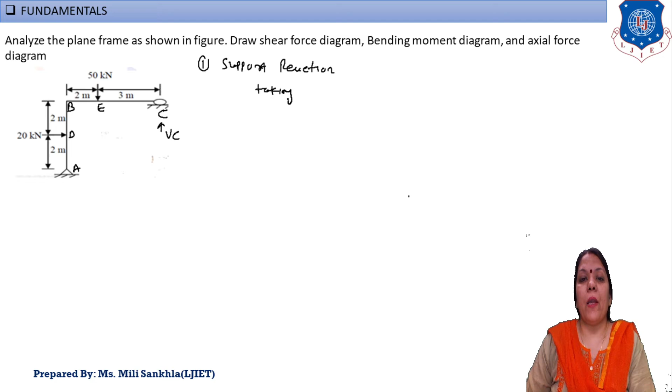Now the first step of this frame is to find out the support reaction. Okay, write here support reaction, and support reaction is always found with respect to any reference point. Suppose here I take reference point A and assume that the support reaction at C point is in up direction. So write down here taking moment about A, and moment we find out with respect to vertical force and horizontal distance or horizontal force and vertical distance. Okay, moment is equal to force into perpendicular distance.

This VC rotates anti-clockwise. Mention here anti-clockwise is equal to clockwise. VC with respect to A point is a vertical force, and the horizontal distance up to A is 5, and the induced moment is anti-clockwise. So write on the anti-clockwise side VC into distance 5. Now on member BC the 50 kN load rotates in clockwise direction; 50 is a vertical load and distance is 2 meter. Write on the clockwise side 50 into distance 2 meter.

Okay, plus again this 20 kN load is given and this load about A rotates in clockwise direction. 20 kN is a horizontal load and the vertical distance up to A point is equal to 2 meter. Write here 20 into 2. Okay, and after solving this my answer of VC is equal to 28 kilonewton in up direction.

Now second we find out the support reaction at A. Write here VA is equal to our total vertical load minus VC. Now in this given frame one load is horizontal and the second load is vertical, but when we find the vertical reaction then we take the vertical load. So vertical load on this given frame is 50 minus this 28, and my answer is equal to 22 kilonewton, that is also in up direction. Okay, we found two support reactions, VA 22 and VC 28. Okay, here we balance our first equilibrium condition, sigma V is equal to 0.

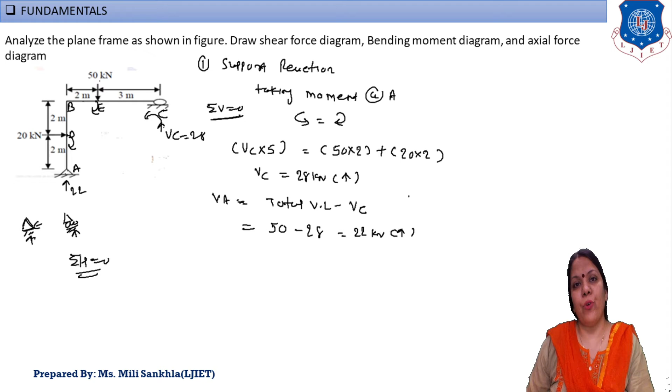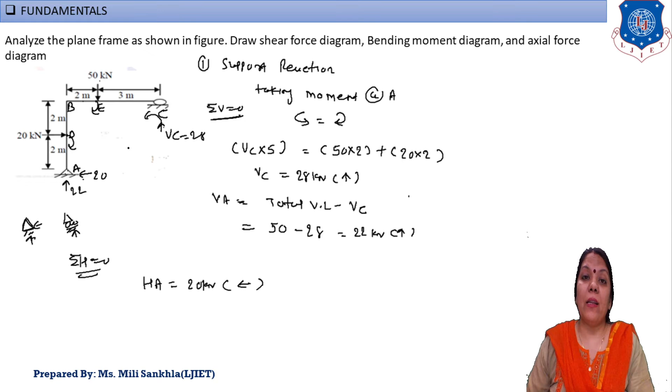Now second we balance sigma H is equal to 0. One support is hinge and second support is roller. Now what is the support reaction of hinge? Vertical and horizontal, and for roller that is only vertical. That means horizontal reaction is balanced by hinge support only. Okay, roller support can't balance horizontal reaction. Here in this given frame horizontal force 20 kN acts in right direction, so HA balances this 20 kilonewton force in left direction. Okay, now my second force on support A is equal to 20 in left direction. Okay, now my given frame is balanced externally by horizontal and vertical forces.

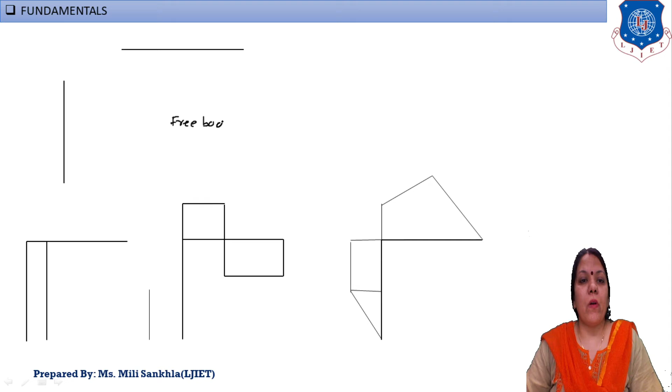Okay, now next after finding out support reaction we draw the free body diagram. First of all write down this one is a free body diagram. Okay, and first of all give the notation. This is A, here B point, C. Okay, and load is given 20 kilonewton and this point we take as D. Distance is 2 meter, then 2 meter. Okay, and here load is given 50 kilonewton and this point we take as E point. Okay, now one by one the support reactions we found, we also mention here.

At A point we find out the support reaction, that is 22. Our horizontal force is given, 20 in the left direction, and at C point we find the support reaction, that is 28 in the up direction. Now one by one we balance member AB, and second we balance member BC.

Now again I take clockwise direction. I can't jump; one by one balance the members. First we start at A point. At A point, the bending moment we find out later on. First I balance horizontal and vertical forces. At A point, force is given upward. It is balanced by 22 in the down direction.

Next, the 20 force: the actual force is given on the left side, and here a 20 kilonewton force is already given on the frame on the right hand side. That means our actual force is balanced here. There is no need to carry the actual force forward to the next member. Because at A, 20 kilonewton left side is given and 20 kilonewton right side is given, our actual force is balanced here. There is no need to carry this actual force to the second member.

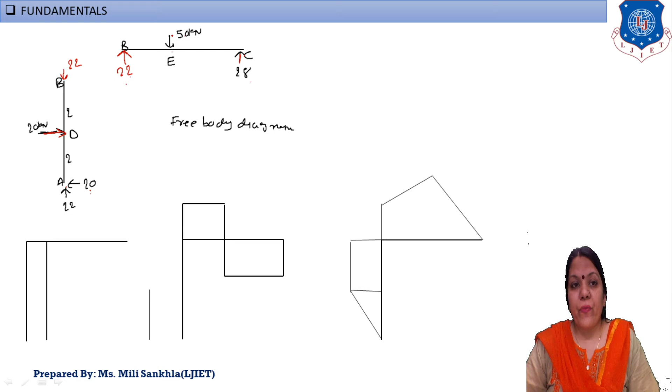Now next, this 22 in the down direction. To balance 22 in the down direction, apply 22 in the upward direction. Now 22 up direction and 50 down direction. 50 minus 22 is equal to 28. We apply this 28 force in the upward direction, so our force is balanced. 28 plus 22 is equal to 50. 50 down and 50 up, member BC is balanced.

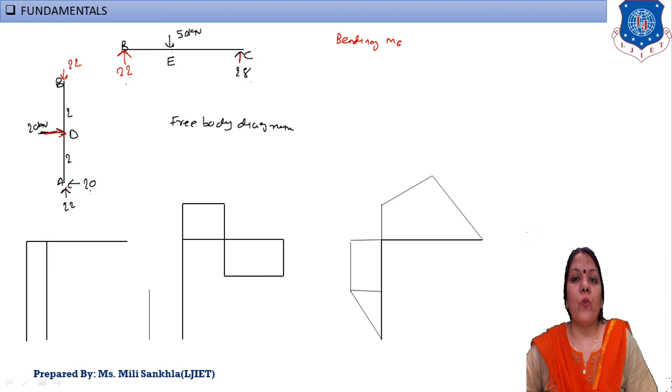Now we find out the bending moment. So mention here the heading of bending moment. The next step is to find out the bending moment, and again bending moment is found point by point. First point is MA, then second we find out MD, and at B point, then we find out the moment at E point, and last we find out the moment at C point.

Now one by one. At A point, a hinge support is given. A hinge support is subjected to only two support reactions, horizontal and vertical. A hinge support is not subjected to moment. That means support A is subjected to zero moment. Now at D point, a clockwise moment is induced, that is 20 into 2. At D point, moment 20 into 2 is equal to 40 kilonewton meter.

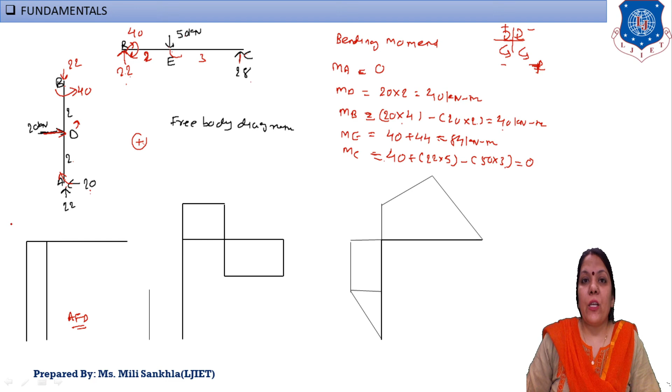Our first diagram is our axial force diagram. In axial force diagram, tensile force is plus and compressive force is minus. If our value is positive, plot outside the frame, and if our value is negative, plot inside the frame. Okay, now member AB is subjected to compressive force. Look at this, from this point this member is subjected to compressive force, that means negative force.

Okay, first of all give the notation: A point, then this one is our B point, and this one is our C point, and here I draw inside the frame. Okay, complete this. Axial force is also like a point load, so draw a rectangle, and the sign is minus, and value is equal to 22, and here is 22.

Okay, now next again give the notation: A point, this one is our B point, this one is our C point. Here this diagram is our SFD, and what is the sign convention of this SFD? Simply upward, upward, downward, downward, and plus, minus, minus, plus. This is left side and this is right side. Now one by one, from this point, this is left, right, left, right.

This is upward force, so here I draw AB upward, and the SF diagram of point load is in form of a box. From A point, height is equal to 20. At D point force is in down direction, so go up to this constant, and here complete this diagram. This is 20, plus diagram, because right hand side downward is positive.

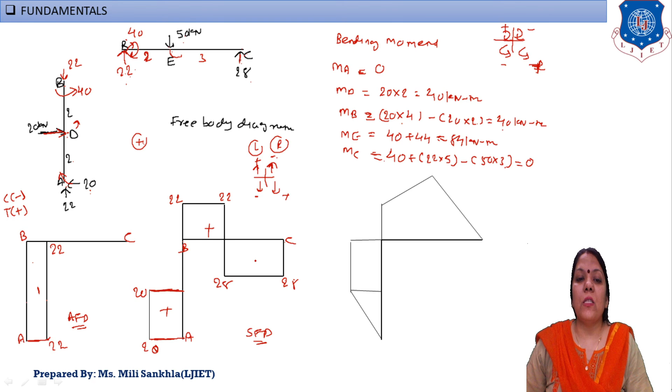From this 28 to this 28 up direction, this is right side. Right hand side upward is minus. Okay, simply 28 and join here at this point. This is our minus value. Okay, this one is our SF diagram for this given frame.

Now last we draw our BM diagram, so mention here BMD. First we give the notation: A point, B point, C point. This point is our D, this point is our E point. Okay, now one by one, moment at A is equal to 0. And what is the BM diagram of point load? That is incline. At D point we get positive moment.

From this D point height is equal to 40, and at B point 40, and this is our anti-clockwise moment, but left and right side anti-clockwise, again positive, so mention here 40. From this point to this point diagram is constant, and from A point to the moment at D point we simply connect with incline.

Now B point is subjected to moment, that is clockwise. Here B point is clockwise, and left side clockwise is positive. Height we find 40, and at E point 84, and this answer is positive, so at E point our answer is positive 84 up, and moment at C we find 0. Simply connect these points with incline. Here our BM diagram for this given frame is complete.

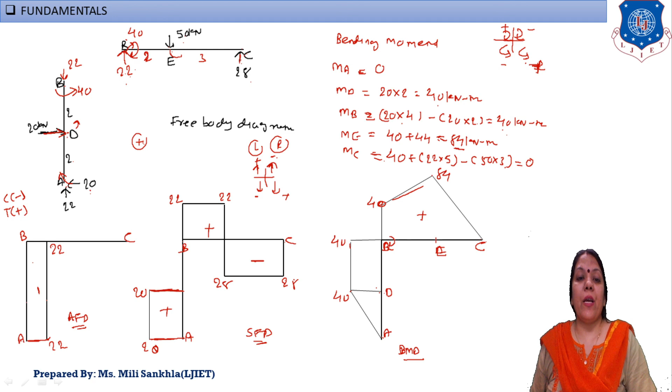Okay, next we solve the example of UDL, a frame subjected to UDL load. Just now we stop here.